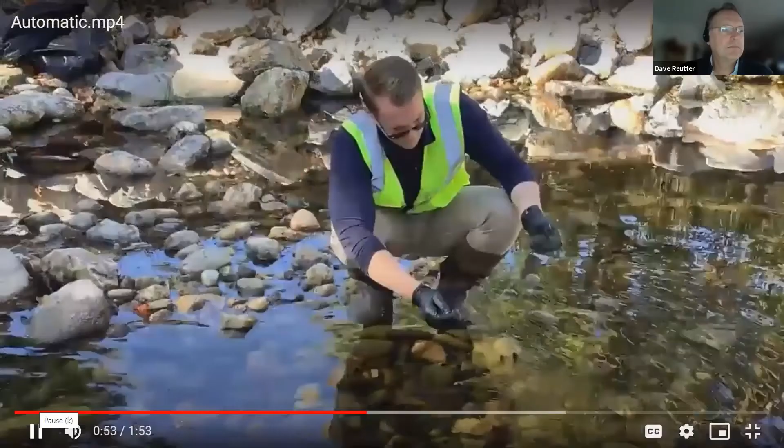One of the reasons we do trash pickups is some of the effects it has on the wildlife. You can see here that we've got some netting trapping fish in the creek itself, and they're still alive. We let them go, but this trash effect is real problematic in urban areas.

All this week is Stormwater Awareness Week, so do something, take some action to do something for water quality in our neighborhoods.

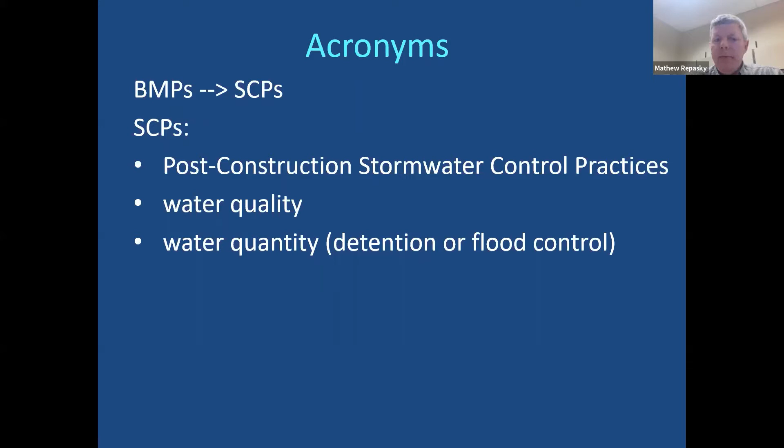So if you've seen the manual, generally the overall structure compared to the 2012 manual, we didn't change the same 7 sections, but we did make some changes to the appendices. We trimmed out several of them and then replaced them, adding maybe one or two new ones actually, D and E. One of the overarching goals with the manual was to try to make it less complex, smaller, and more usable.

The other big thing we did, and I'll get into this later, is we tried to look at existing Ohio EPA regulations or standards and guidelines. Those guidelines, through the construction general permit, become adopted standards if you really push on it. We tried to make reference to those rather than what we had in 2006 and repeated in 2012, where the city's manual was maybe ahead of the state's manual at that time in how to design practices. But since then, the state published their manual, the Rainwater Land Development Manual, and we felt more comfortable utilizing that. While it wasn't set as a state standard, we tried to look at it as such wherever it made sense to do so.

There are other regulations, but there's also other documents outside the Stormwater Drainage Manual. These are all available on our columbus.gov/stormwater website, but there are other documents that we've created that you'd need in order to submit a plan and get a project through the city's process, in addition to the design based on this regulation.

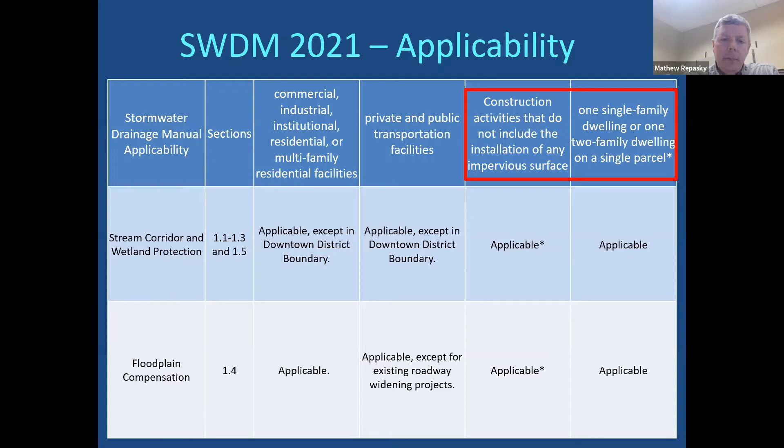Another thing we looked at when reviewing plans was whether you're proposing a routine maintenance project - this typically applied to transportation projects, but it wasn't clearly defined in the manual. So we came upon OEPA's routine maintenance exclusion and adopted that formally into our language.

When it comes to flood control, and this may impact some of you in surrounding communities using our regulation, before our thresholds were 2,000 square feet of new impervious surface or 2,000 square feet of disturbance. We've modified that to be 10,000 square feet disturbance of impervious area. That's a fairly significant change that modifies what projects will trigger the manual.

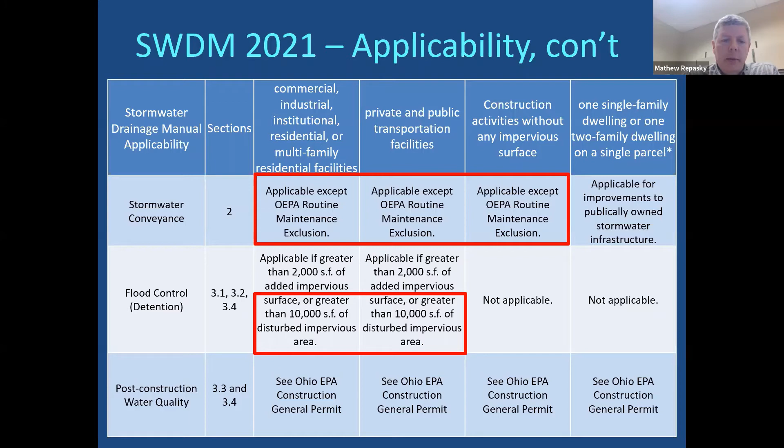Another change was to the definition of impervious surface, influenced by conversations with Ohio EPA and a few projects we ran into over time. We added gravel parking lots and artificial turf surfaces specifically in our definition of impervious surface.

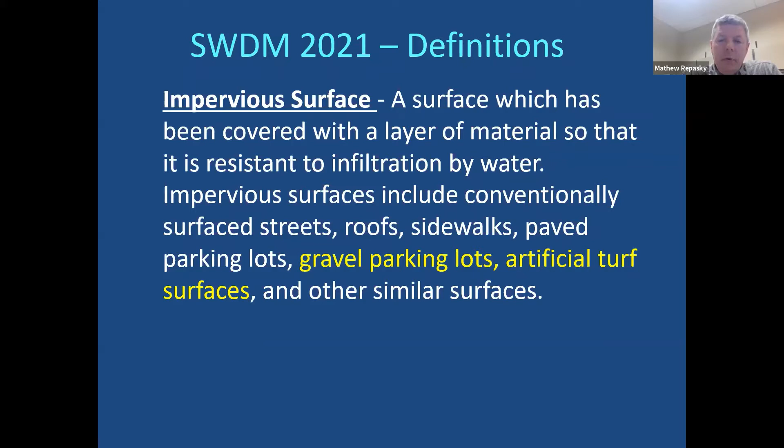This was a request from the development community for clarity when we talk about redeveloping and looking at how long a site sits in its present condition - how far back does that look go? That was always something we negotiated through the plan development process.

The concept here is if there's an old building on a parcel and somebody purchases it, demos the building, removes all the rubble, and puts grass on the site - at what point, when you look at pre and post conditions, do you consider that an impervious surface versus a grass surface? We can look at it today and see grass growing, but historically there wasn't. That cutoff point and differentiation was nebulous, so we tried to put more of a 5-year definition on that.

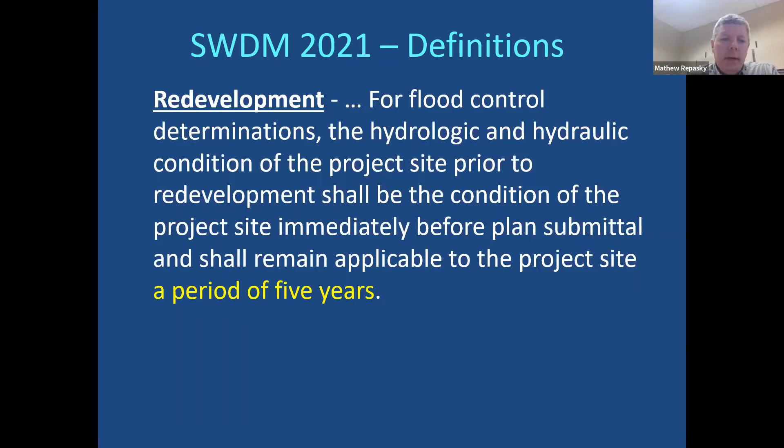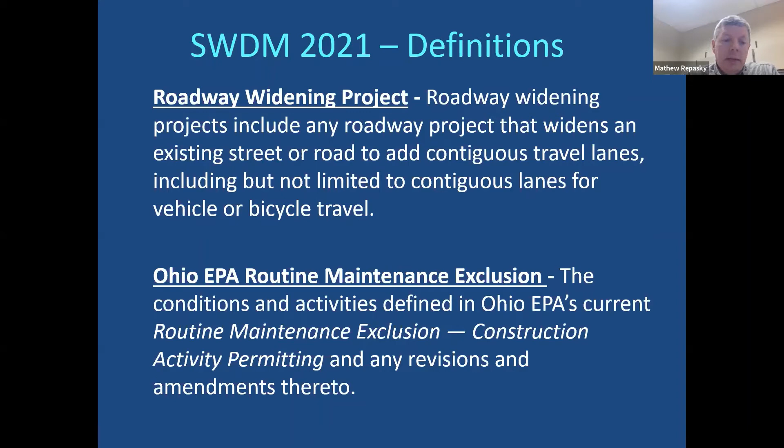And then again, as I mentioned, roadway widening projects was a definition we needed to add, and specifically making clear that routine maintenance exclusion is something we incorporated as well.

Moving to section 1, where we're looking at preservation and protection, there was a change on the construction general permits, where they combined 3 into 1. The Rainwater Land Development Manual and the Stormwater Drainage Manual had different equations depending on which watershed you were in, and our equation differed slightly. So we directed everything to what's in the construction general permit or the Rainwater Land Development Manual, and removed the previous equation we had in there.

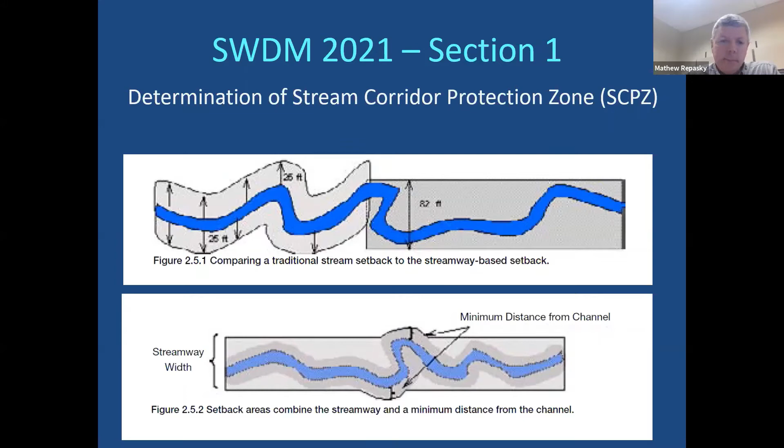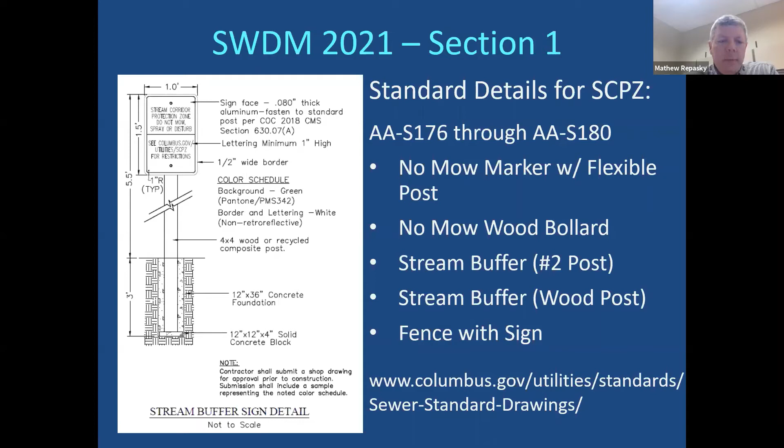The other thing we did, based on requests from the community, was develop standard details for marking the stream corridor protection zone in the field. We had always referred to a sign or another aesthetically pleasing method, and that was too unclear for people. So we created standard details, and this is an example of one, to provide the guidance requested by the community.

Section 2 is mostly about the hydraulics on the site, so some of the more engineering components. A couple of highlights there.

We had a couple of projects where existing soil, surprisingly in Central Ohio, did allow for infiltration as a practice, and we didn't actually have a provision to allow that. So it was this strange situation, do you need a variance? The manual regulation doesn't allow it, but you've got soil tests and engineering calculations showing you will infiltrate everything into your natural soil. So we made clear that you could do that.

Based on research, we used to allow up to 300 feet of sheet flow when doing travel time designs. But in my experience, I remember learning as an engineer in school that you were supposed to go out in the field, walk the watershed, make observations about where your water starts to concentrate, and then do a measurement. I don't believe many people actually did that, so by default pretty much every design I've ever reviewed had 300 feet. But there is substantial research by USDA and others showing it really needed to be lower than that, so we changed that 300 maximum to 100 feet maximum.

And then just a minor comment, we used to have minor losses included in our pipe calculations. We eliminated that and modified Manning's and the friction component to make up for those, just to try and make things a little easier on designers and reviewers too.

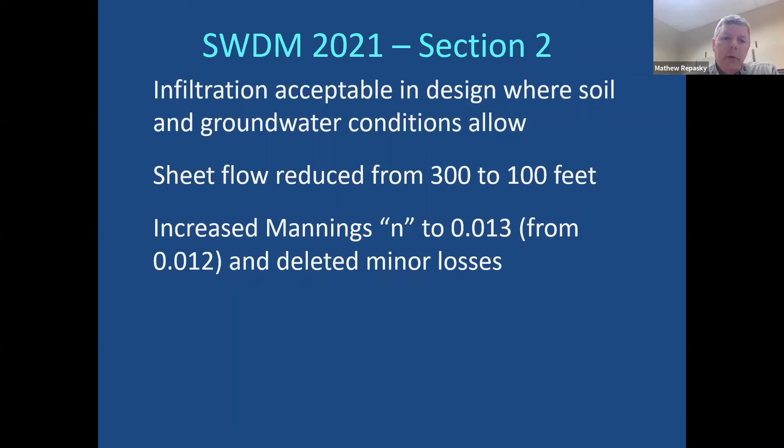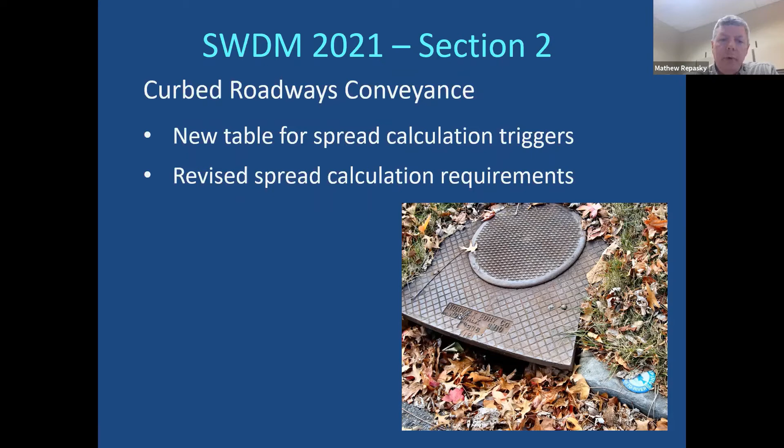Another substantial change, done by our public service departments, was the curb roadway conveyance, the spread calculations, which is really the safety component of how much ponding on a roadway is allowed before it becomes a hazardous condition. That section has been heavily modified. In advance of the manual, due to demand from the community, they released an interim memo. The information in that memo is then formally adopted into the Stormwater Drainage Manual regulation to replace what had previously been in there.

So section 3 is really where we get into the practices themselves and the hydrology of the site, how to size them and select them. Here, as I mentioned previously, we really lean and direct in many places to the Rainwater Land Development Manual for our design standards.

Part of the education, when I've talked to folks over the years, one of the issues, when I look over some of the complaints we received on the maintenance side of the post-construction practices, a lot of it has to do with the stagnant pools, the forebays and micro pools.

If you really look at the state's guidance, they're calling for a minimum of 3 feet water depth on the forebay and 4 to 6 feet on the micro pool. My observations, I don't see that often, and I think that contributes a lot to the issue.

The other design concern is that in our previous manual, as well as in the Rainwater Land Development Manual, there are charts indicating for each practice, whether detention basin or bioretention, the recommended or minimum drainage area needed. I think the default for a lot of designers is to pick a dry detention basin on a pretty small site, probably because it's low cost, but it doesn't have the watershed necessary to really make it function well.

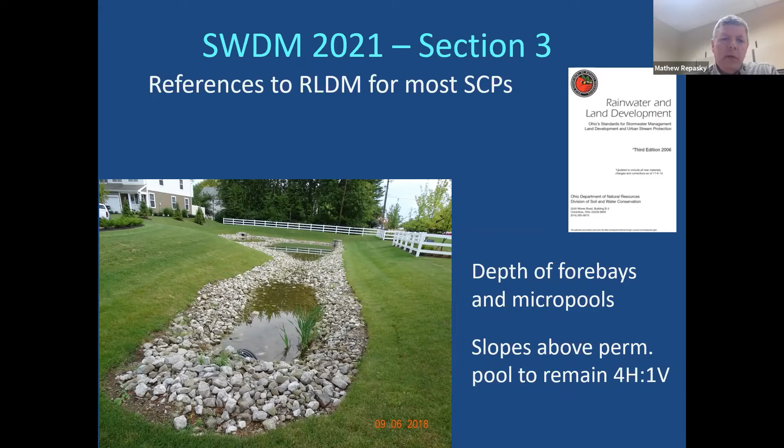The underground storage section used to be pretty short, maybe a paragraph. That was substantially modified and now occupies a couple of pages with specific details based on learning through trial by fire. As we got a lot more of these designs in, we had to make adjudications on the fly. We incorporated all of our lessons learned and put that into the specification.

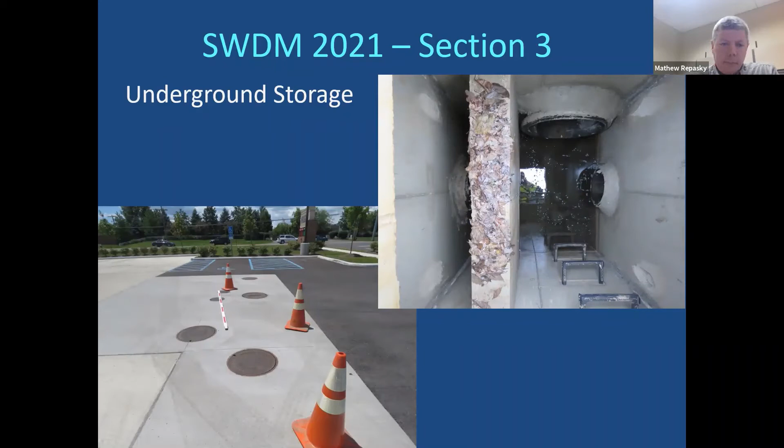Blue roofs are something we've seen enough of that we felt we needed to put in specific details. Rather than having your detention basin down on the ground, you're putting it on top of the building. We borrowed heavily from New York City's specification on that one.

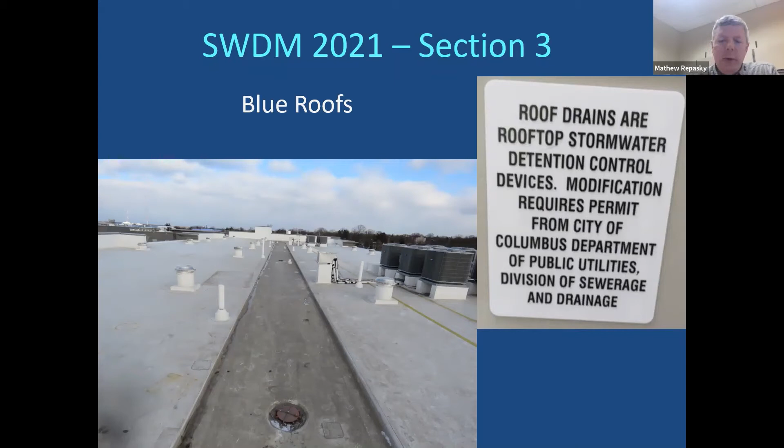There used to be an exemption if your project site was close to the Olentangy-Scioto River — an exemption on your detention requirements. The thought here goes back to hydrology: if you think about those peak flow curves, this was trying to avoid stacking those peaks, where detaining water on a site downstream of a big flow coming down the river could actually contribute to the maximum flow when it released. That was the concept, but in practice we found it was open to abuse, so we went ahead and eliminated that specific exemption.

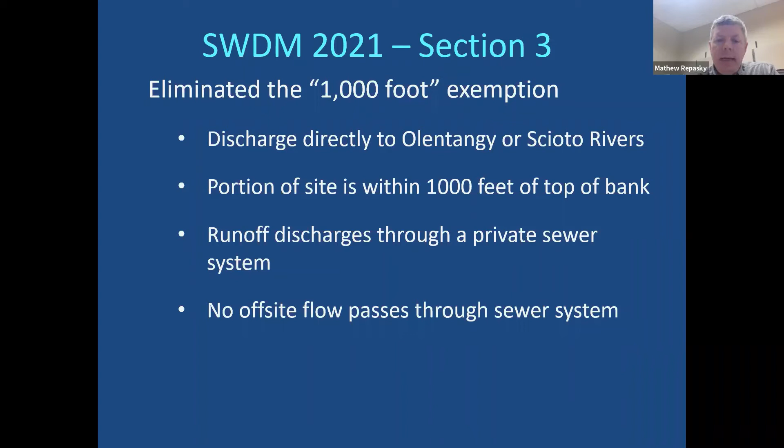We've always had a section on high-risk areas, normally targeted at commercial activity areas, as it's called in the manual. Based on experience, we defined some high-risk areas we may not traditionally think of as commercial activity areas, which are more light industrial. We get a lot of issues with grease, particularly at facilities that generate it, like restaurants and fast food restaurants — grease management, location, and handling. So in those situations we specifically require an oil water separator on the storm sewer system, to provide extra protection in case there's a failure to contain the grease or other trash properly.

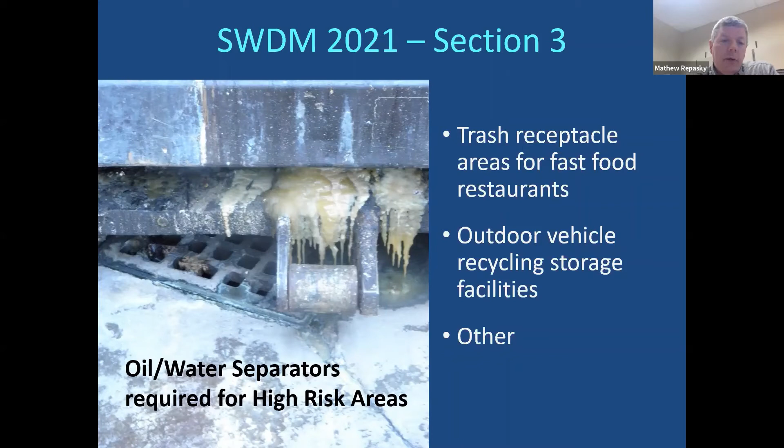We used to have, and we still do have, a constructed wetlands section in the manual, but when we really looked at it, it had some pieces in it that didn't quite meet the definition of green infrastructure. So we've added a whole new section called shallow constructed wetlands that is specifically geared towards if you want to have a green infrastructure practice that's a wetland, you can do so successfully and still also get some detention benefit from it. It's always kind of difficult to engineer, but we do have a constructed wetland and then a shallow constructed wetlands section in there now.

We used to have our own bioretention soil mix specifically in the manual. We removed that and now point to a standard specification that you could find on the city's blueprint page. There's several specifications we make available specifically for those blueprint projects. But that specification was reviewed in consultation with the state and other outside parties. So it's a pretty solid spec, and we just refer to it now rather than having the state spec, the Stormwater Drainage Manual spec, and then a different spec for just blueprint.

And then, of course, pretreatment was always something that's been required depending on what practice you have. That wasn't always clearly spelled out in the manual, so we tried to make that a specific section and call that out a little more clearly.

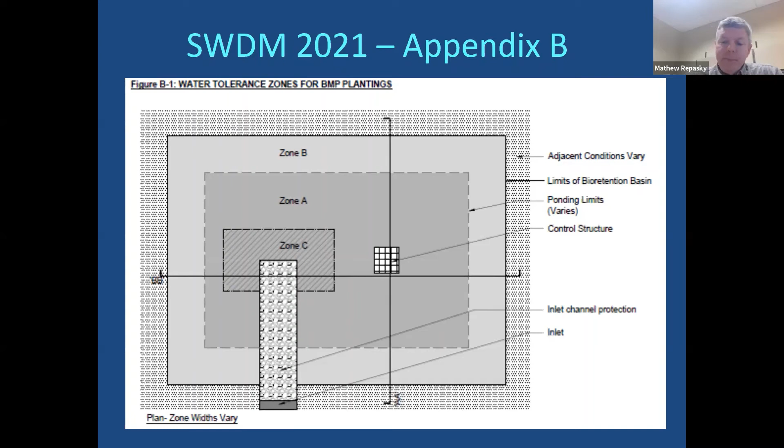Section 4, and I'll touch on this now and get into a little bit more detail towards the end of the presentation. This was another substantial change. This was always kind of our maintenance section. And so some of the big things that we did through a lot of conversation with the development community is, if you have a project that has a temporary sediment settling pond or a post-construction stormwater control practice, we're requiring a specific $10,000 construction bond for that. And that surety must be in the form of a bond.

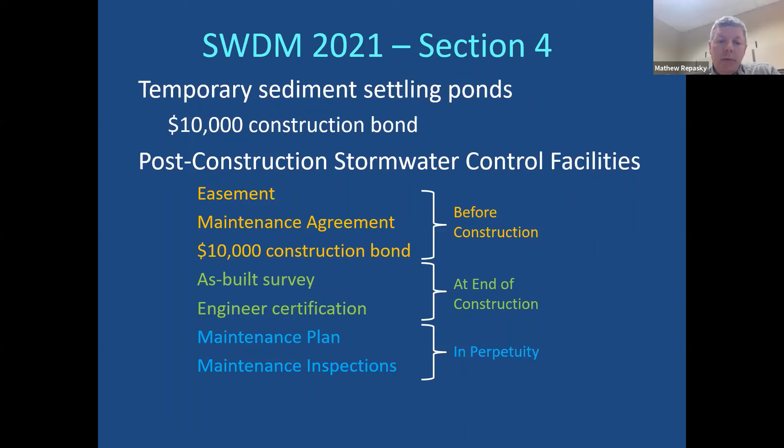The other thing there is, as I highlighted, we're also requiring an easement to the city and a maintenance agreement signed by both the owner and the city for that project. Now that easement is going to grant the city the right to enter the property and maintain it and charge the owner should the owner fail to maintain that practice as they're required to do so. So for SCP maintenance, we have the maintenance agreement now, which is going to be a recorded document, and that just puts it in place that owner must inspect and maintain.

One of the challenges that we found is that ownership of properties changes. There's these engineered stormwater structures on the sites that just look like maybe vegetated sections of the parcel, and owners didn't know that they had that. And so as a recorded document, we're removing the ability for somebody to plead ignorance. I purchased a home a few times. That stack of papers is pretty thick, but hopefully folks read it and realize that they're taking on this obligation and that they're aware of what's required and what to expect, so that when we show up to do our inspection, it's not the first time they're hearing about it.

And like I said, that easement will surround those post-construction practices, and it also grants the city access. And this is really a fallback, but it traces back to one of those requirements in the construction general permits, as well as going through our experience with USEPA. We have an enforcement action, we can take you to court, but at some point, there's still this obligation on the city to make sure people are maintaining it.

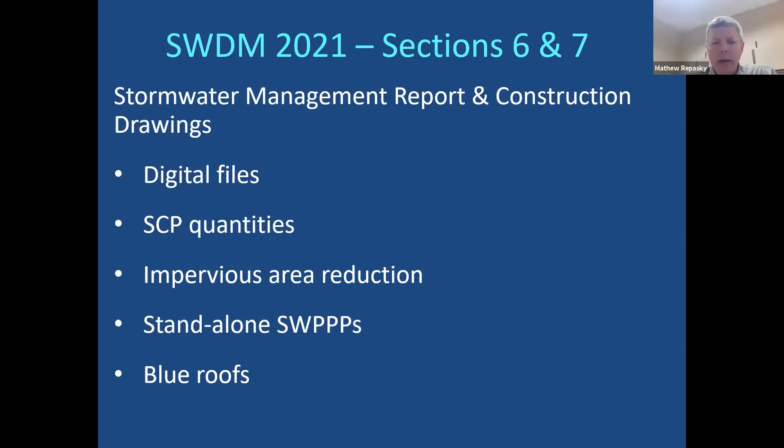And then getting into standalone SWPPPs, which has been a requirement of the permit for a long time. But in Columbus, we had kind of broken that complete SWPPP into multiple different pieces. And that was just a matter of how we internally administer the whole site development, plan development process. So we always had those pieces, but now we're requiring the designers to put those together into a single package that actually meets the definition spelled out in the construction general permit itself.

So as I kind of went into that table, Appendix D is where we really go into the bid items and list that out. CMSC is just Columbus's material and specification manual. So making reference to that, and then just making clear what specific quantities we have for each of the SCPs that are on a site. And then Appendix E, probably for most folks here, is just providing a template for folks to utilize to put together both the SWPPP that covers the construction portion, as well as the maintenance plan for the post-construction portion.

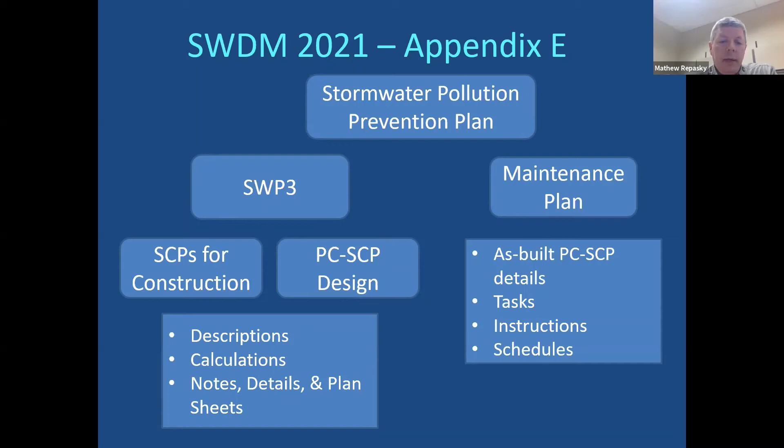All right, so I will pause there for questions, Brooke, if you have some. Yep, I've got a couple here in the chat box.

So the first one was asked, what will be the rule for the SCP easements if the storm structures are vaults within a building footprint? This occurs on many downtown or urban projects. Correct. Yes. So that question, we've already internally answered that one. We crossed that path. So we will not require an easement for those, but we will require the recorded maintenance agreement.

Okay. And then the other question I have is, would you happen to know if the EPA requires the O&M agreement be recorded prior to construction start, or is that left for the local MS4 authority? I would need to go back to the permit to be able to answer that question. And I think Dave and I, we've had some conversations about that too in the past. Dave, do you remember if we did get an answer regarding that? I don't recall at the moment, sorry.

That's okay. I mean, what I recall is that the agreement was a suggestion in the permit, like it was an option that the local municipality, the MS4, could choose. But like I said, I'd want to double check that. Sure. Looks like John's chiming in on this.

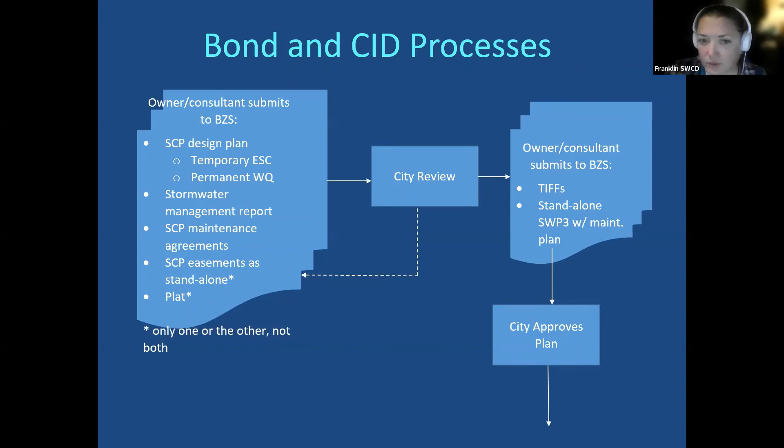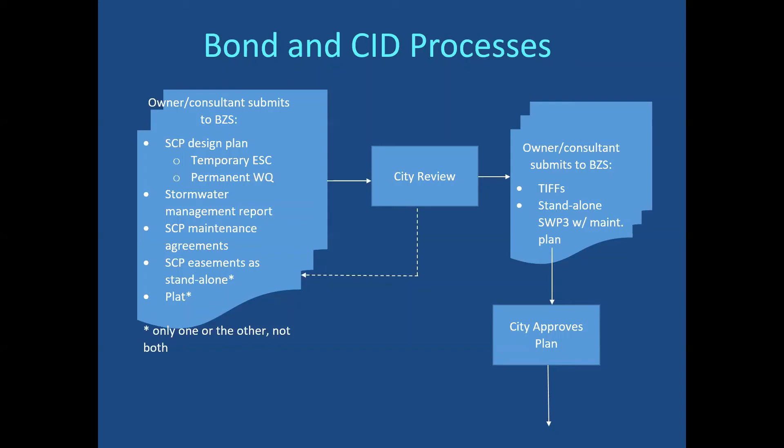Okay, good. So keep taking them. If you guys have questions, keep putting them into the chat and we'll get to them at the end. And we'll certainly have more of a roundtable at the end of Matt's presentation and really open it up for everybody to ask questions. And I want to talk a little bit about post-construction as well at that time.

All right, so I've only got about 5 slides left. So on the bond and CID processes, I'll explain what we do in Columbus here. We require when you submit a plan that has stormwater components on it, the pipes, your other structures, your SCPs, we require you to put down a deposit, and then folks in our Division of Design and Construction actually come out and do inspection. And that's kind of a requirement.

So you have this construction inspection deposit, and that pays for the city staff to go out and do those inspections. It doesn't cover any inspections done by my staff, but that's a totally different group. And then what we added in is the bond. And that was really to give us leverage if a project just stops working. And what I mean by that is what we really saw, 10, 12 years ago now, the Great Recession. There were a lot of projects that started and then they just were abandoned.

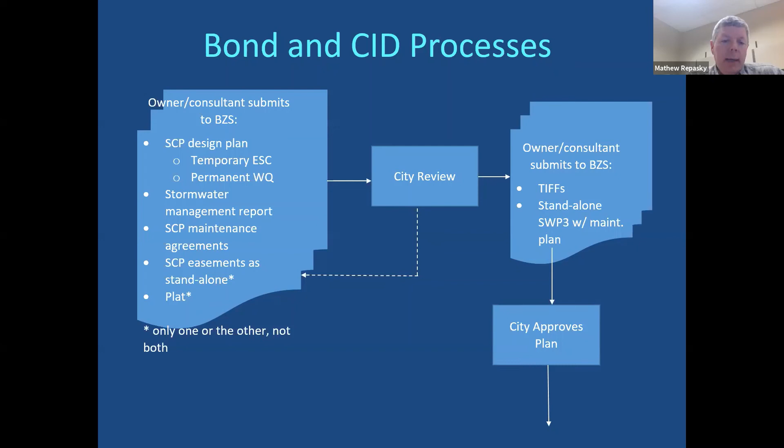So the bond is there to try and prevent those issues. And then really, the process involves this whole package of materials and documents that get submitted up front to our building and zoning services department. We've got a loop there for the city review. Once you get through that, you're submitting those other documents, the standalone SWPPP and the maintenance plan, and then we're approving that.

From there, both the easements, if they exist, get recorded, but regardless, that maintenance agreement gets recorded. If an easement exists, that maintenance agreement is going to be an exhibit attached to it, so it's just one recording. But in the case of a plat, or if that detention facility is in a building, the reason we aren't going to require easements is that there's a huge amount of liability and it becomes pretty complex legally to do so. But we'll still have the maintenance agreement recorded.

And then that's an internal process where our GIS unit records that data in our internal digital repositories. Then we move into what folks had always done, putting down the money for the inspection deposit, which is now going to accurately reflect the cost of those SCP constructions. I'm not saying it didn't before, but it's going to be a little bit more inclusive now. And then that surety bond as well.

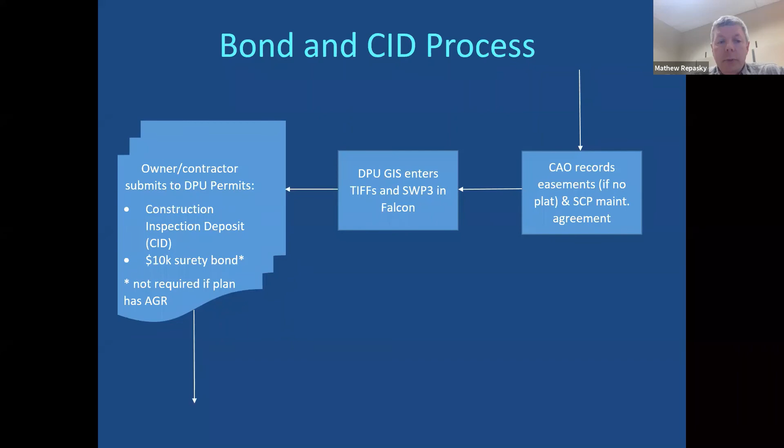And then from there, we go into another process, which I'm not going to detail out today, but I do have a presentation next week where I will go through that one. That's just going through the city's internal mechanisms for how we're doing inspections, what somebody needs to do to get their bond released, to get their inspection deposit back, and really to lay out all the internal workings of the city as different groups and departments interact on a project. So that's a separate process.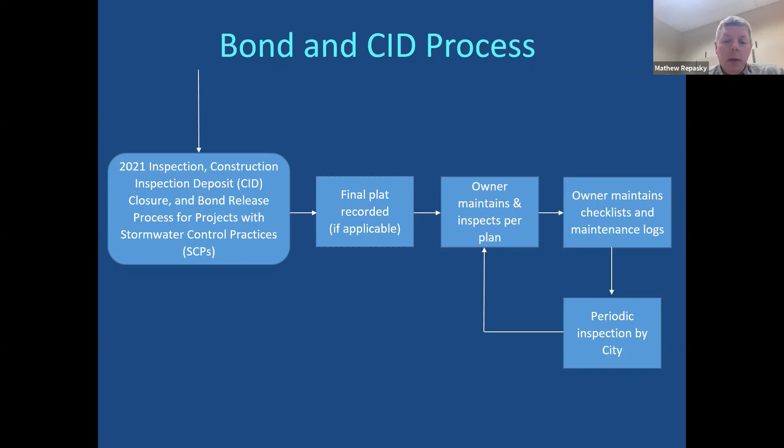For those that have plats, the plat gets recorded after the work is done, and then we just go into that maintenance phase. The owner is required to maintain and inspect it. We're going to come out periodically and check the site. We'll issue reports, and we may have requirements if something's deficient. We'll follow up with enforcement if necessary, but that's kind of the necessary route.

We always had a provision in there, but now we're requiring on all projects that an as-built survey be performed of the stormwater control practices, and then the design engineer needs to certify that it was built according to plan. Sometimes things deviate a little bit in the field, so the engineer is going to take on that responsibility to make sure it still meets the construction general permit requirements and other city regulations as applicable.

If that deviation is significant enough, they'll have to go through a plan revision process and maybe submit new calculations to us to show that what was constructed, even though different, still meets all the requirements. And depending on how things change, if necessary, they would need to revise their maintenance plan as well. So once those four items are received and somebody in the city has signed off, then we'll move that approval forward, and the bond and any deposit would be returned. That's all detailed out in section 4 of the manual.